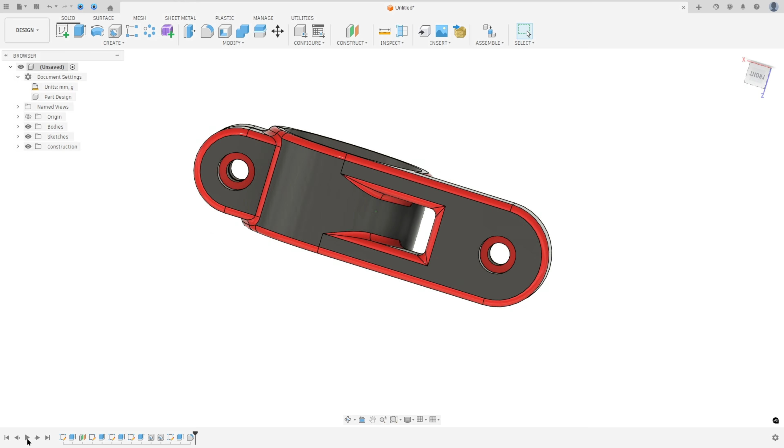Let's create one more tutorial in Autodesk Fusion. In this video, you'll learn to use extrude, offset plane, hole, and fillet. So open Fusion and let's go.

The first step to create this part: we will select the top plane and make this sketch, with the midpoint here. The first thing we make is a circle with 50 millimeters of diameter, and extrude this 30 millimeters.

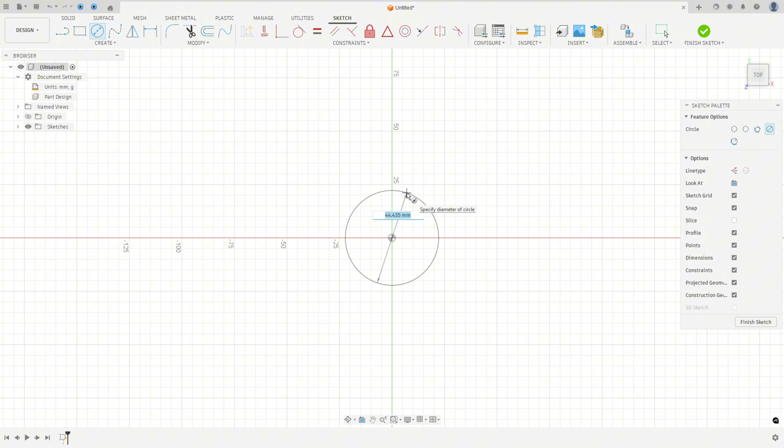So go to create a sketch, select the top plane, select the circle, click here on the midpoint, 50 millimeters of diameter. Finish the sketch, go to extrude, 30 millimeters, and press OK.

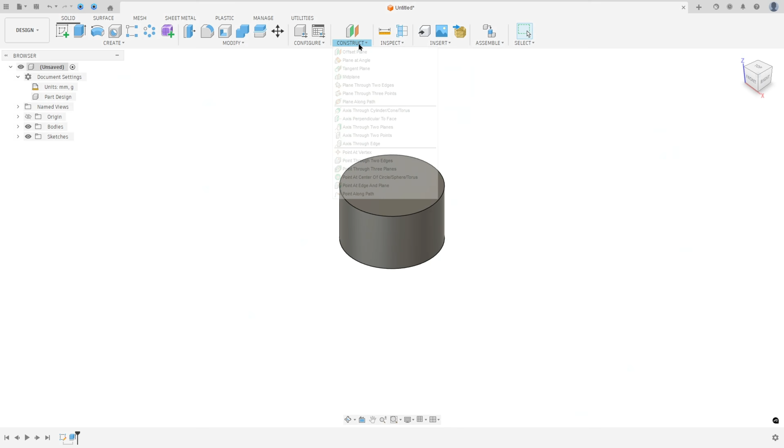Now we will create a plane here. This plane is an offset of the front plane. The distance here is 25 millimeters, the radius of this circle. So go to construct, select offset, select the front plane, minus 25 millimeters. The minus is just to change the direction, and press OK.

Select this new plane and go to create a sketch. In this new plane, we will create this sketch. The first thing we make is a line here with 30 millimeters.

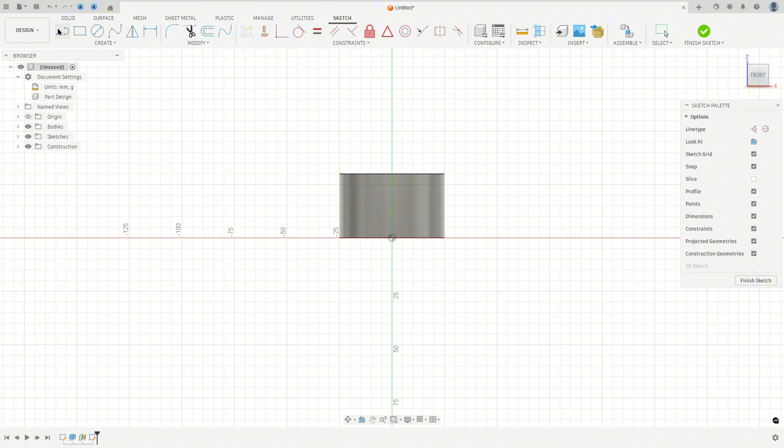Here in the center of this line, we will create a construction line with 65.5 millimeters of length. So select the line, click here in the midpoint, 30 millimeters. I made two lines here, sorry.

30 millimeters, and select line again, a construction line. Make a construction line here with 65.5 millimeters of length. Go to constraint, select the midpoint, select this point and this line here.

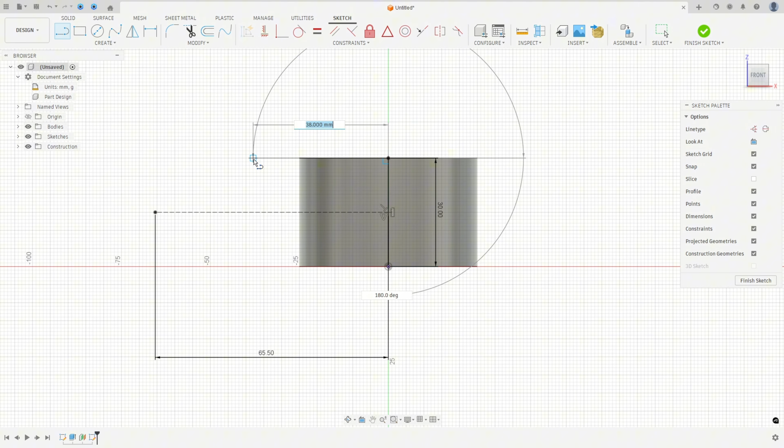Now we will create a line, an arc, and another line. So select a line, click here at this point, make a line, remove the construction line type, make a line, click with the left button and hold to create an arc, and make another line here. Make sure this line is horizontal. Go to constraint, select coincident, select this arc and this point here.

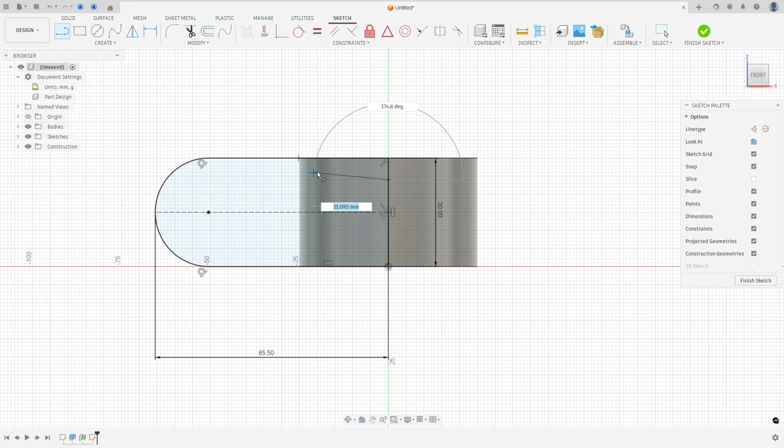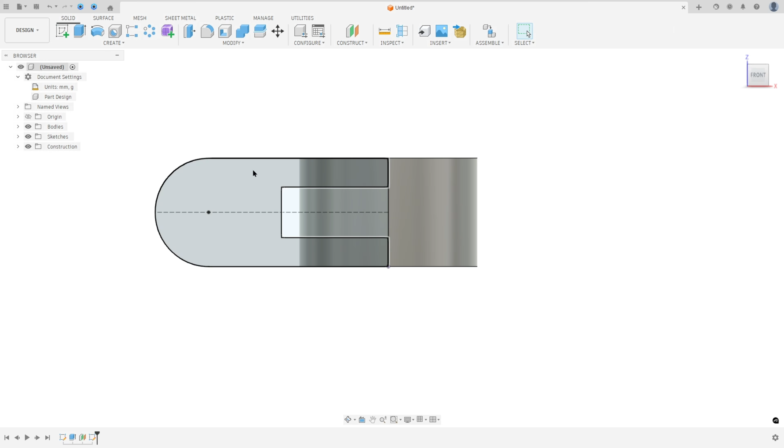Now we will create this rectangle here, 30 millimeters by 14. So select the line, 30 millimeters by 14. Go to sketch dimension, the distance between these two lines is 8 millimeters, to make this rectangle centered. Finish the sketch — we made this profile.

Now we will extrude this 15 millimeters. Go to extrude, select this profile, 15 millimeters of distance, operation join, and press OK.

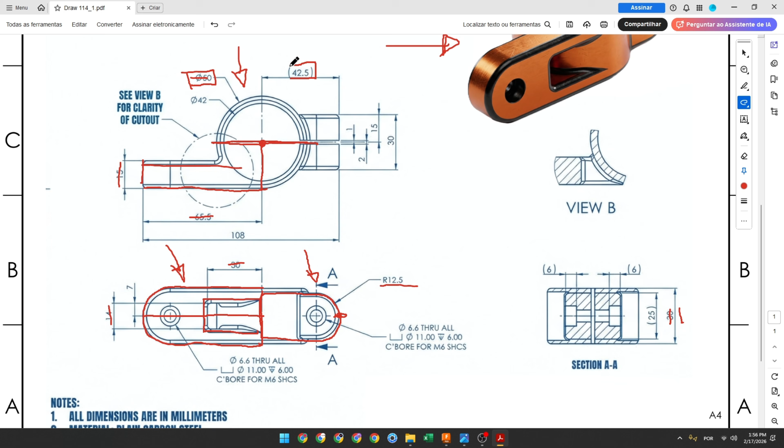Now we will select the front plane and make this sketch. Here in the front plane, we will create this sketch. The radius here is 12.5, and the distance between the tangent point and the midpoint is 42.5. So let's create a construction line and make this sketch like we made on this other side.

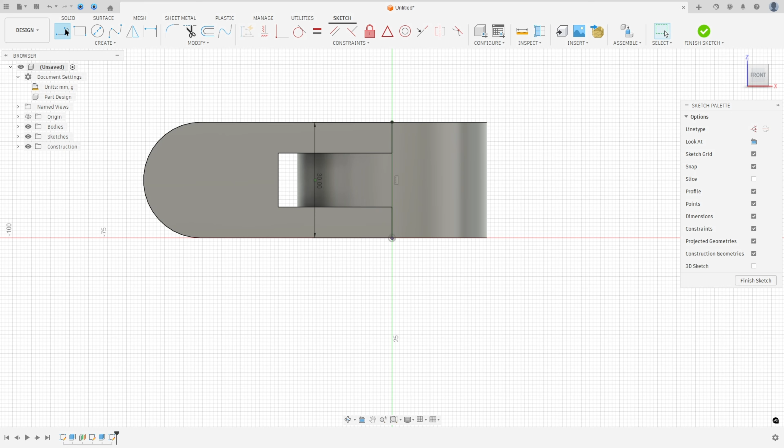Go to create a sketch, select the front plane, select the line, click here in the midpoint, make a line with 30 millimeters of length. Then select a line again, construction line — I will hide this bar a little. Find the center here, make a line with 42.5 millimeters.

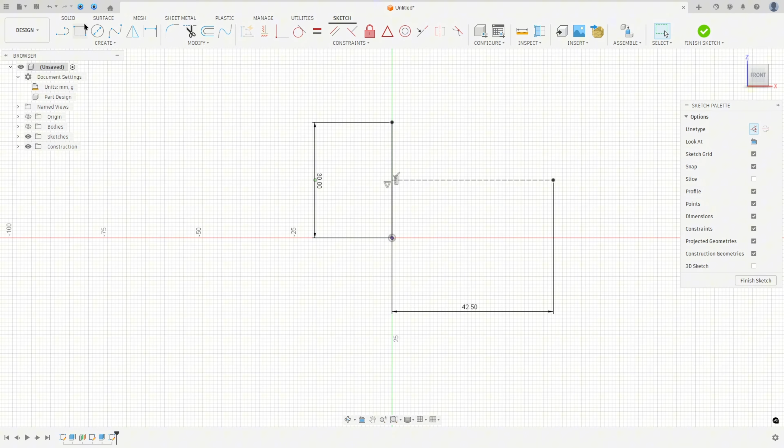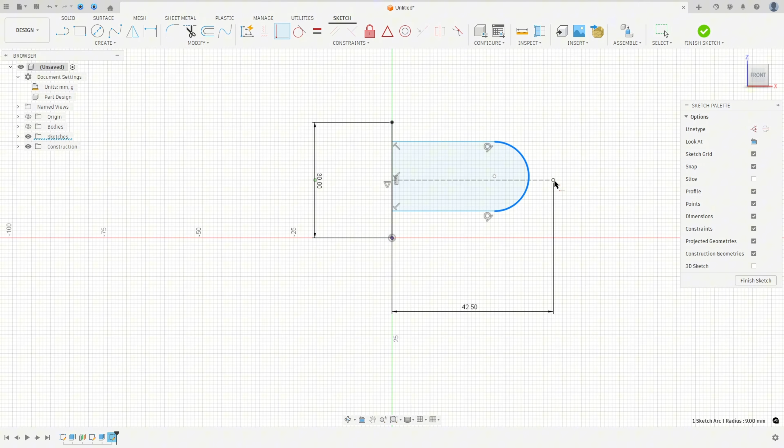Now here we will create this line, this arc, and this line, 12.5 millimeters of radius. Select the line, remove the construction line type, make a line, make an arc here, and another line. Make sure this arc is tangent with both lines. Go to constraint, select coincident, select this arc and this point here, and select the center of this arc and this line. Go to sketch dimension — the radius here is 12.5.

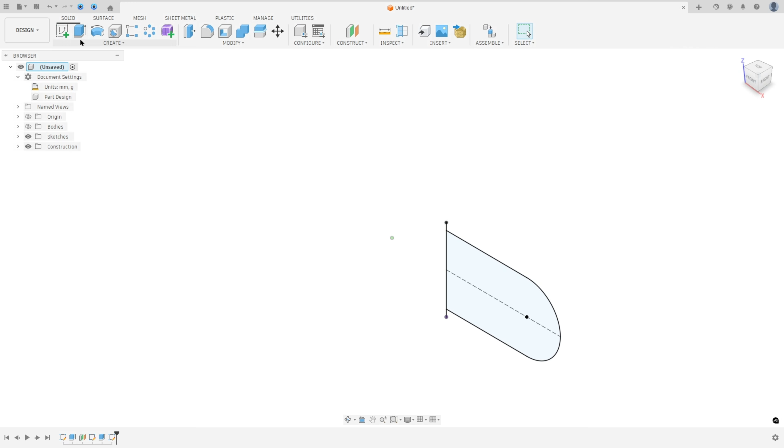Now we need to extrude this 30 millimeters. Finish the sketch, go to extrude, show this body. The direction symmetric, measurement whole length, the distance here 30 millimeters. Operation join and press OK.

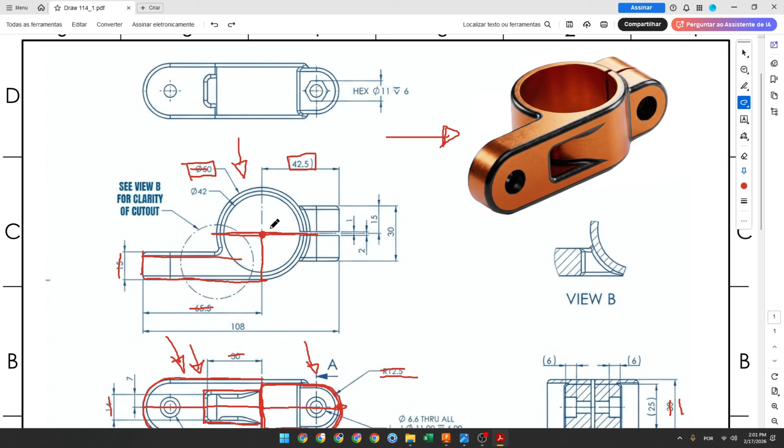Now we will select the top face and create a sketch. We will create a circle with 42 millimeters of diameter, and make a rectangle here to create this cut, with a distance of 2 millimeters and a length of 42.5 millimeters.

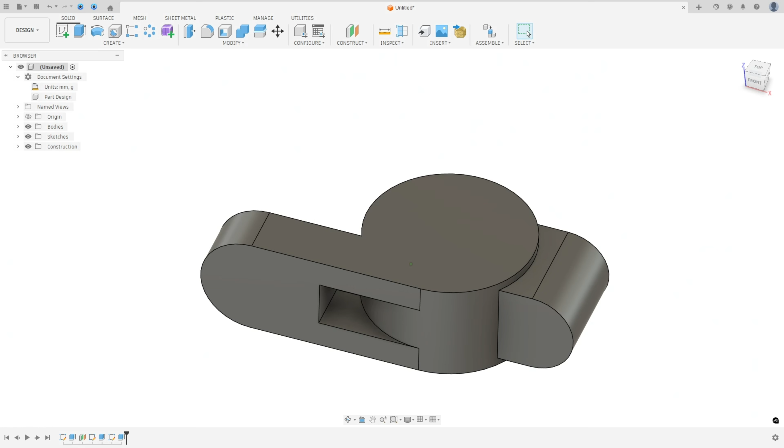Select this face and go to create a sketch. Select a circle, click in the midpoint, and make a circle here with 42 millimeters. Select the 2-point rectangle and make a rectangle here. Go to constraints, midpoint, and select this line and the center point here.

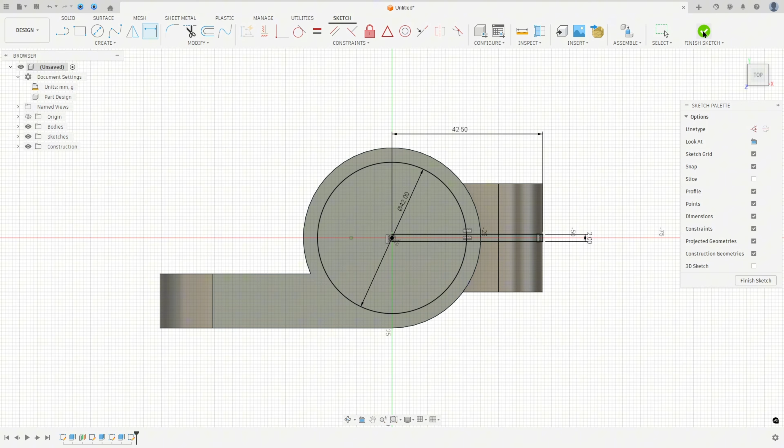Go to sketch dimension, the distance here 42.5, and the distance here 2 millimeters. Finish the sketch, go to extrude, select all this profile, and the extent type select all, flip the direction, the operation here is cut, and press OK. We made this cut here.

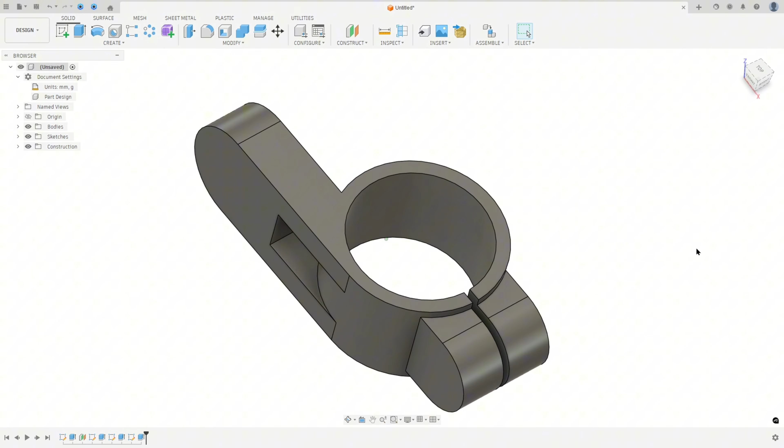Now we will create this hole here. This is a counterbore hole. The diameter is 11 millimeters, the depth 6 millimeters, and the hole through all is 6.6 millimeters.

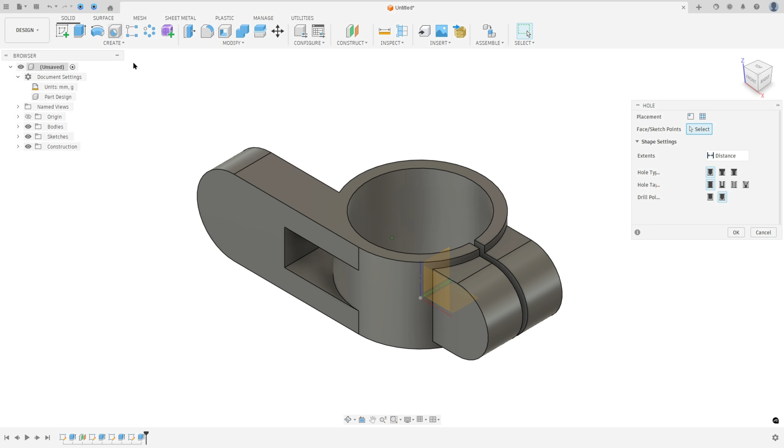Select the hole and select this face here. For reference, select this arc, extent, select all, the hole type select counterbore, the diameter here 11, the depth 6 millimeters, and the diameter here 6.6, and press OK.

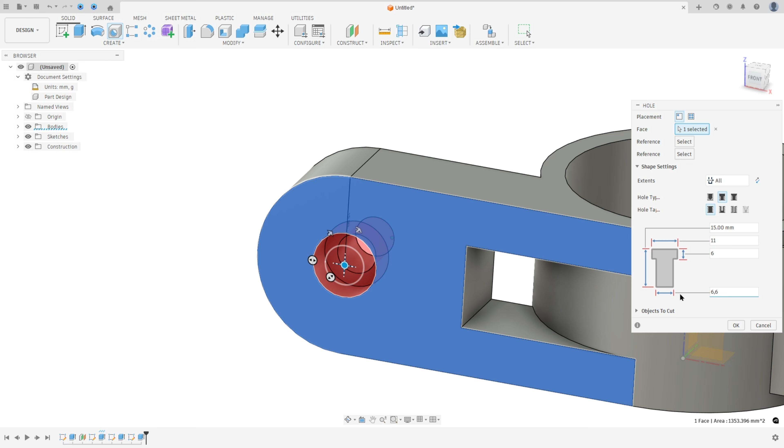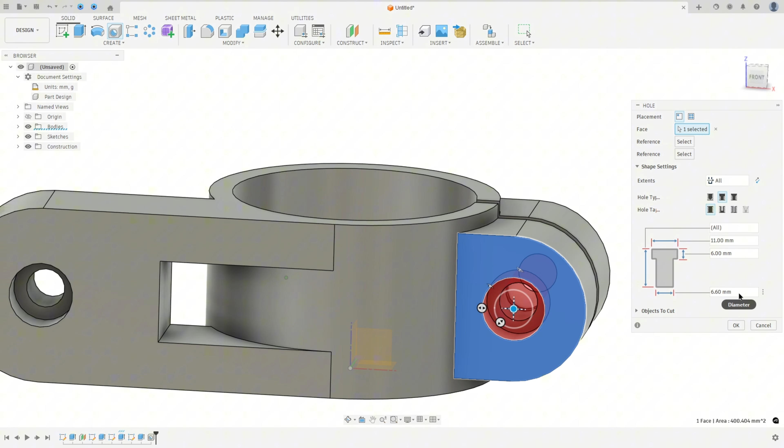Now we will create this hole here with the same dimensions. Go to hole again, select this face, the reference select this arc, extent, select all, the type counterbore, the diameter 11, depth 6, and the diameter of the hole 6.6 millimeters, and press OK. We made this cut here.

Now we will rotate this part a little bit and go to create a sketch, selecting this face. In this face we will make this sketch. We will create a hexagon, and the distance here is 11 millimeters.

The depth of the cut we'll make is 6 millimeters. Go to create a sketch and select a polygon, select circumscribe polygon, find the center of the circle, and make a polygon here. Go to sketch dimension, the distance here 11 millimeters, and go to constraints, make sure that this line is a horizontal line, and finish the sketch.

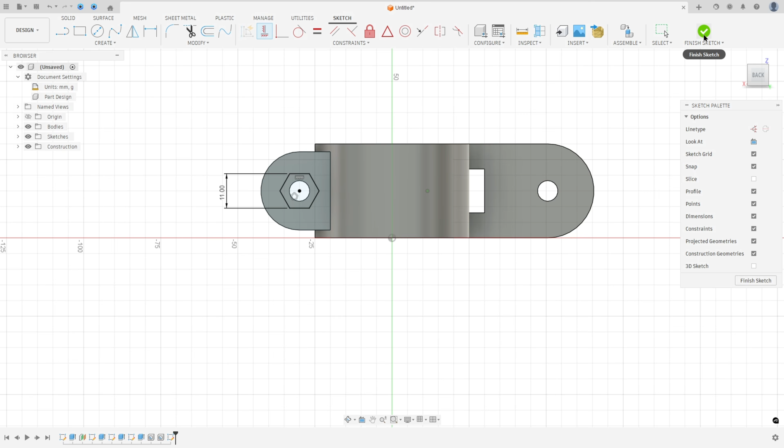Go to extrude, select this profile, the distance here minus 6 millimeters, operation cut, and press OK. We made this cut here.

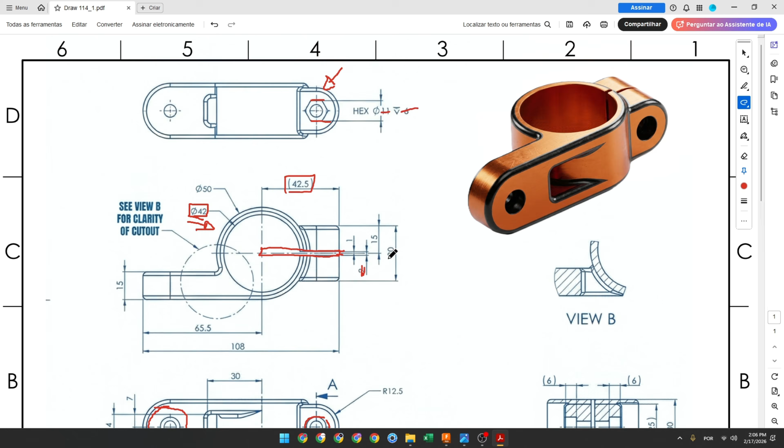Now to finish this exercise, it is missing some information, but all the fillets are 2 millimeters of radius. So all the black edges here are 2 millimeters of radius.

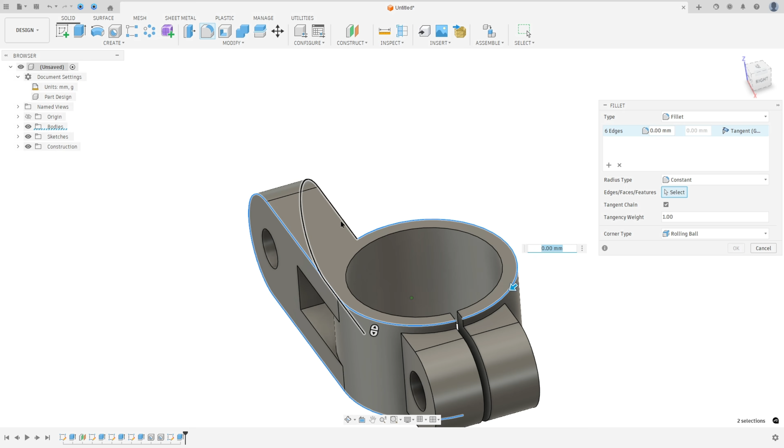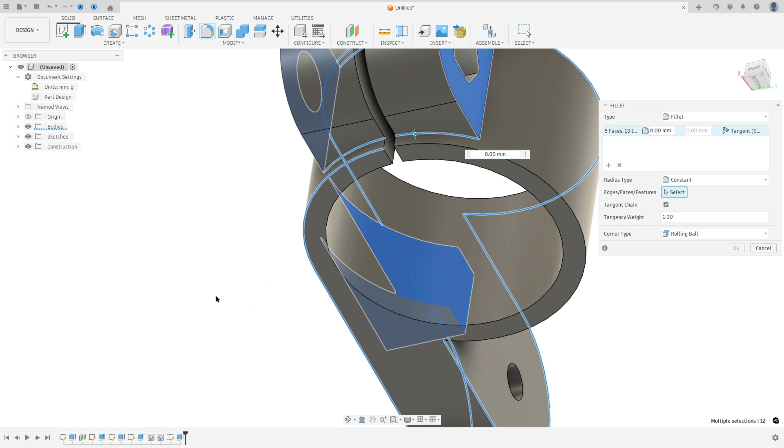Go to fillet and select this edge, this one, select these three faces here, and select this face, select this edge here and this edge here, and the fillet here is 2 millimeters of radius.

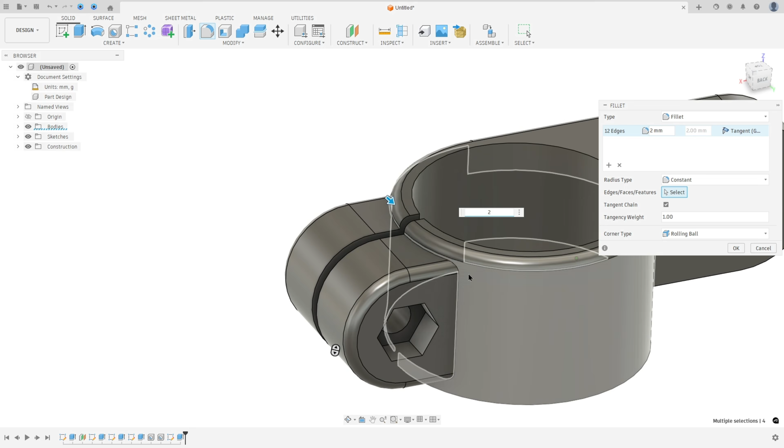We don't need to select this face, let me remove it. Select this edge, this edge here, 2 millimeters. Let me see, let me edit this edge here, and this one, 2 millimeters.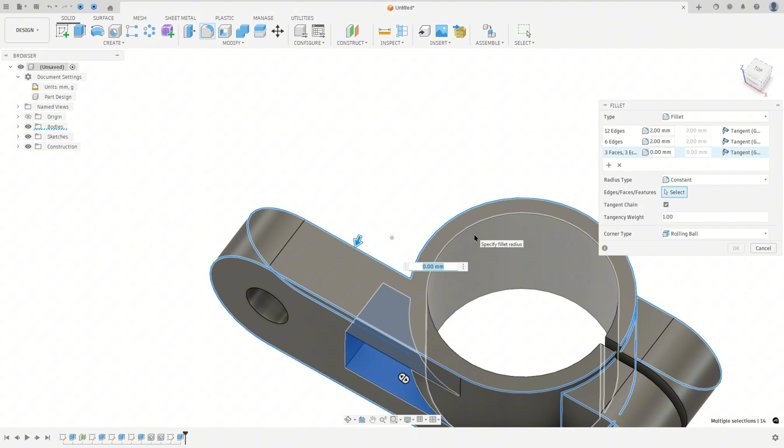Let me add one more, these three faces, and select this edge here, 2 millimeters. Select the bottom edge here, don't forget to select this, okay? Edge this one, and press OK.

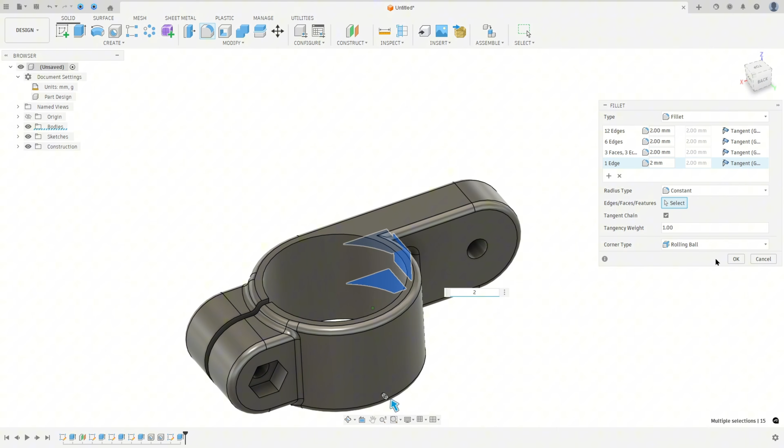And that's it, so here we finish our exercise.